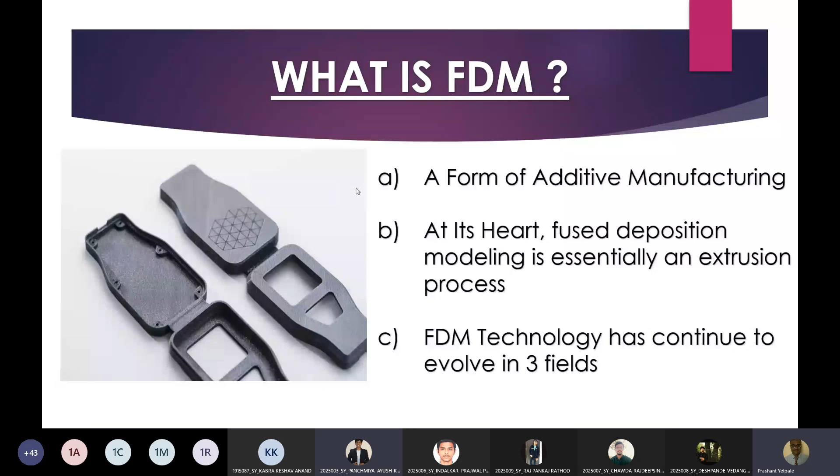So let's learn how FDM works. It's a good question. Here is how the FDM fabrication process works: a spool of thermoplastic filament is first loaded into the printer. Once the nozzle has reached the desired temperature, the filament is fed to the extrusion head, as you have seen in the diagram, and into the nozzle where it melts.

The second process is that the extrusion head is attached to a 3-axis system, allowing it to move in the X, Y, Z directions. The melted material is extruded in strands and deposited layer by layer in predetermined locations where it cools and solidifies. Sometimes the cooling of the material is accelerated through the use of cooling fans attached on the extrusion head.

The third part is that to fill an area, multiple passes are required, similar to coloring a rectangle with a marker. When a layer is finished, the build platform moves down, or in other machine setups, the extrusion head moves up, and the new layer is deposited.

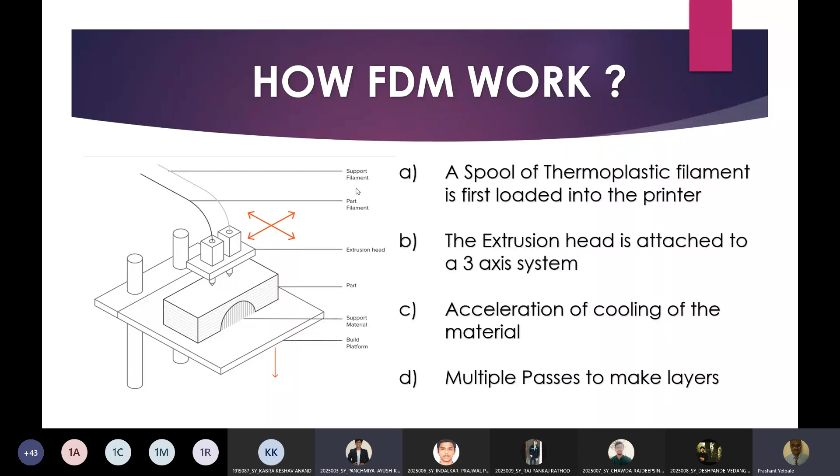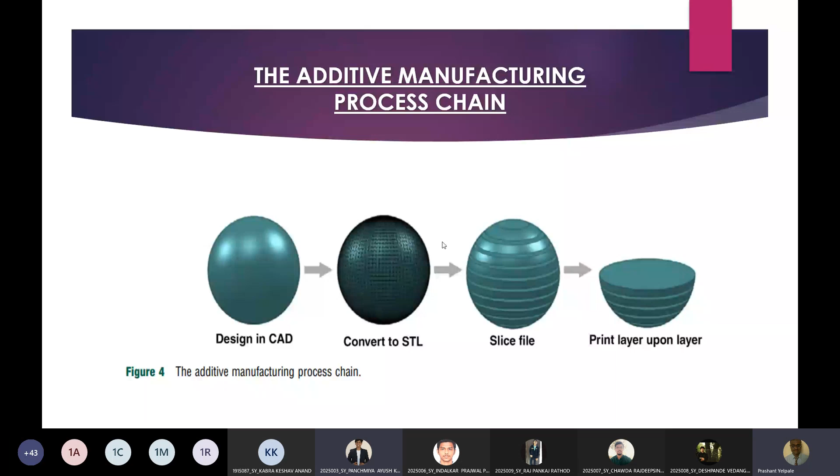This is the additive manufacturing process chain. First, as I have just told you, we design in CAD, then it is converted to STL, which converts it into layers, and then this slice file is printed layer upon layer. So this is a short and brief explanation of how FDM works.

Let's move on to warping. Warping is one of the most important defects in FDM. When the extruded material cools during solidification, its dimension decreases. It is one of the most common defects in FDM.

As different sections of the print cool at different rates, their dimensions also change at different speeds. This differential cooling causes the build-up of internal stresses that pull the underlying layer upwards, causing it to warp, as seen in the figure. From a technology standpoint, warping can be prevented by closer monitoring of the temperature of the FDM system, for example the build platform and the chamber, and by increasing the adhesion between the part and the build platform. So this is something about warping.

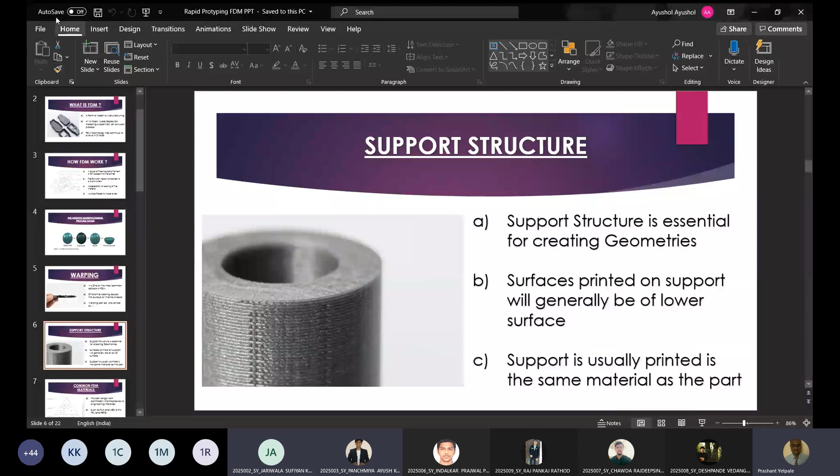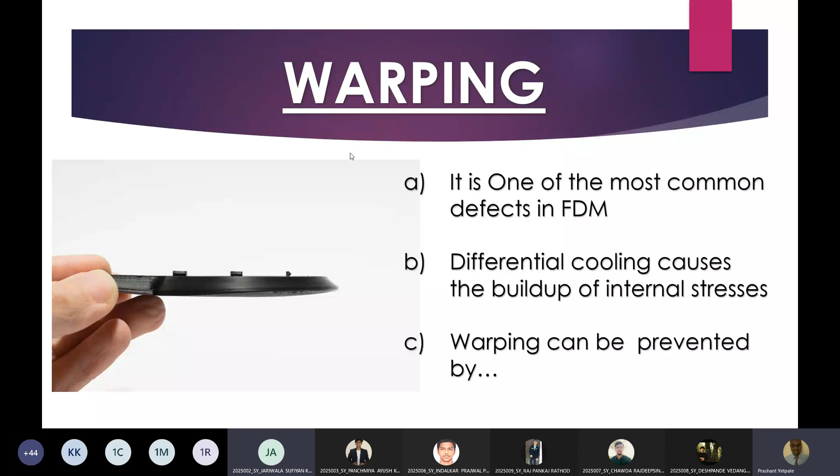Okay, so now warping is in front of me. Yes, from support structure. So my name is Sufiyan Jariwala, I will be doing this support structure part.

The support structure is very essential for creating geometries with overhang. That means if we have a shape with a 45-degree angle, we need an overhang support. Without that, we will not be able to make it, because we cannot directly make it in the air, so we need support or overhang.

It is recommended that the part is designed in such a way as to minimize the need of support, because the surface of the overhang is of lower quality than the other sides. Therefore, it is generally advisable to avoid using supports. There is also a dissolvable support which dissolves after its use, but it is very costly. Next slide.

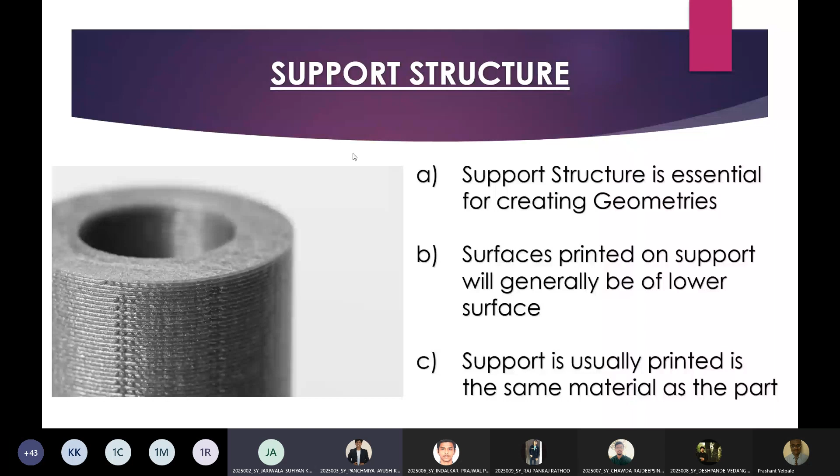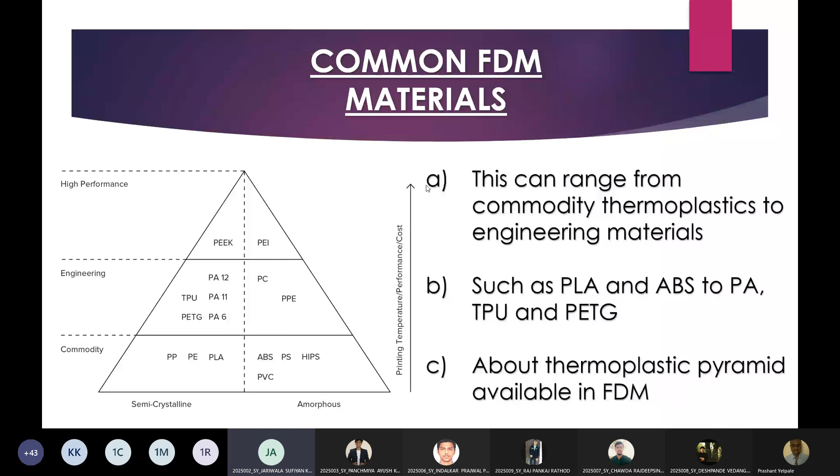There are different characteristics of FDM such as infill and layer adhesion, which are not included here. The common materials used are polymers such as PLA, ABS, PETG, nylon, TPU, etc. The choice of material generally depends on what the user wants to print. The figure shows key criteria needed to choose the material, such as commodity for engineering purposes, high performance, etc.

The post processing processes involved are support removal, sanding, gap filling, polishing the surface, priming and painting, smoothing with vapors, epoxy coating, metal plating, etc. These are the various post processing processes.

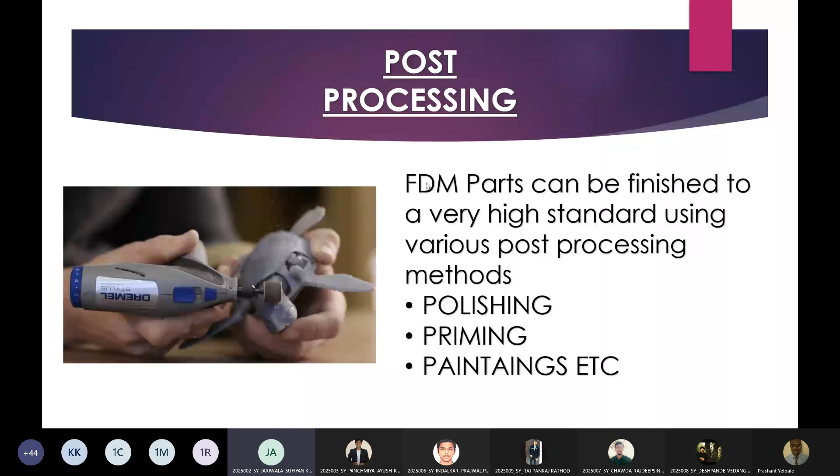FDM process offers several advantages: simplicity, safety, and ease of use. FDM machines are safe, reliable, easy to use, and office friendly. As there is no toxic material, powder handling, intense heat, or laser involved, parts can be handled immediately after fabrication.

The second advantage is no material wastage. Being an extrusion based process, only the required amount of filament material is used to create the part and the supports. Therefore, there is no material wastage.

Variety of build styles. FDM process allows extensive possibilities of tool path build styles used in each layer by altering appropriate process variables such as raster width, fill pattern, raster angle, and air gaps. Raster width or road width refers to the width of the deposition path related to size.

Ease of material change. FDM machines use feedstock filaments in spools and cartridges. Therefore, it requires minimal effort to change material on the FDM machine.

FDM uses a variety of engineering polymers. The simplicity of the FDM process offers potential for introducing new materials consisting of both polymers and composites.

Ease of support removal. Normally, supports can easily be snapped off by hand from models. Its maintenance cost is very low, and machines can run unattended for hours.

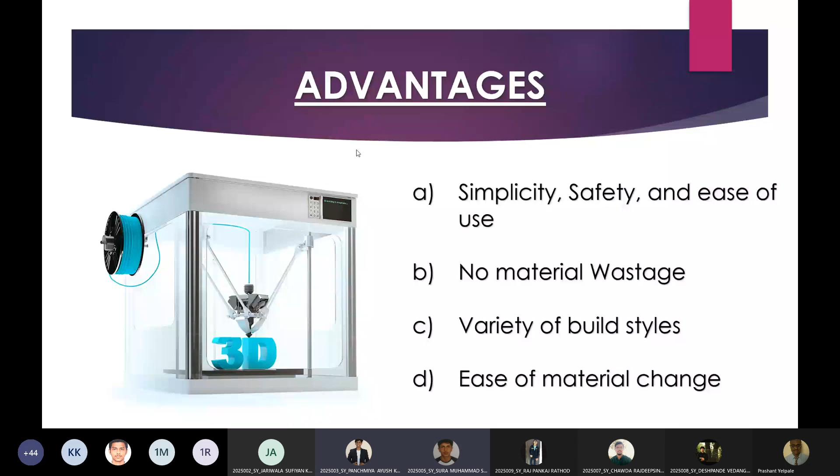FDM has limitations too. The very first limitation is surface finish and accuracy.

As the filament material is extruded through a circular hole of the model tip, the deposited beads have a round cross-section, which limits the accuracy of the parts. Moreover, because of the layer by layer deposition process, the staircase effect on sloping or curved surfaces generally causes a grainy surface finish. The second limitation is build speed.

Generally, build speed is slow because a single model tip is typically used to deposit material. The third disadvantage is feedstock filaments. FDM material needs to be made in filament form of required diameter, required mechanical and rheological properties. Any new material to be introduced must also meet these requirements.

Anisotropic properties: first, let's see the meaning of anisotropic properties. An anisotropic property is a property of an object or substance having a physical property with a different value when measured in different directions. As the parts are built by depositing extruded rods, the mechanical properties of the parts are not the same in all directions. Orientation of the part on the build table also affects the mechanical strength of the part in different build directions.

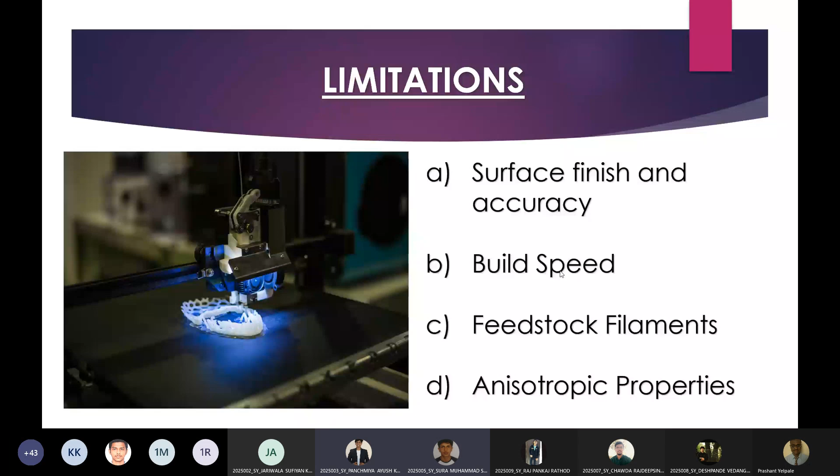Applications: the common application of using FDM for prototyping is well known. Here we will focus on advanced applications deployed in industries that use the FDM process. 50% of the usage of FDM is still for the fabrication of rapid prototypes. As technology continues to improve this area of use, most of the products described below can be considered well beyond the realm of rapid prototypes.

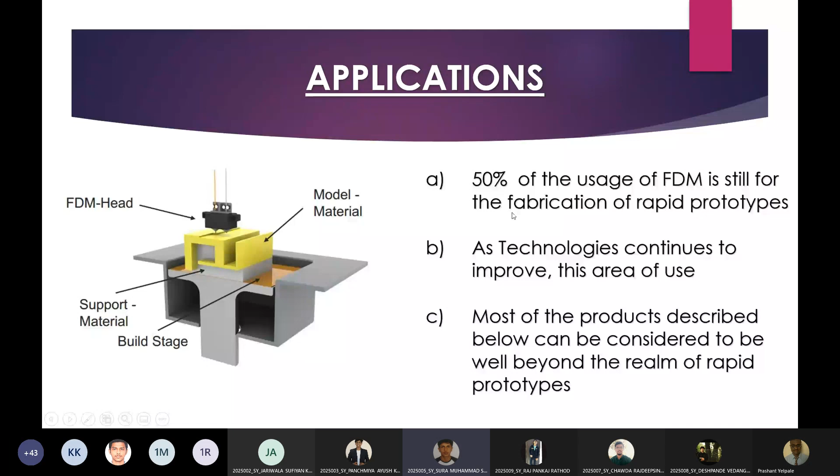The first application is to make jigs and fixtures. Often tools like jigs, fixtures, and guides are virtually invisible when production is running smoothly, but their importance becomes evident whenever problems arise. The adoption of 3D printing via FDM in this sector is driven by the ability of clients to design and test functional parts for form and fit without needing high-cost tooling. With resilient materials, parts are built strong enough for end-use applications. The picture shows inspection of a yoke using an FDM fixture.

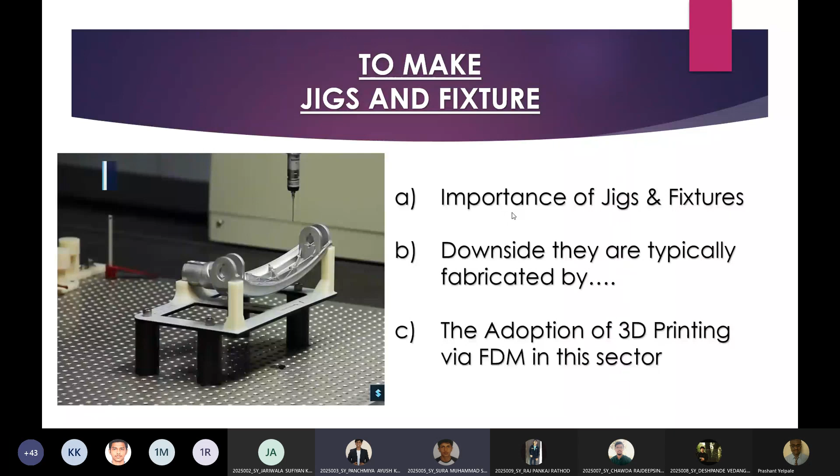The second application is for validating the design of an automobile. FDM truly shines in the designer's ability not to just give the thumbs up to the design, but also validate the design through functional testing. Through FDM, designers have greater confidence that their design will be acceptable once they pass it on to the manufacturing team.

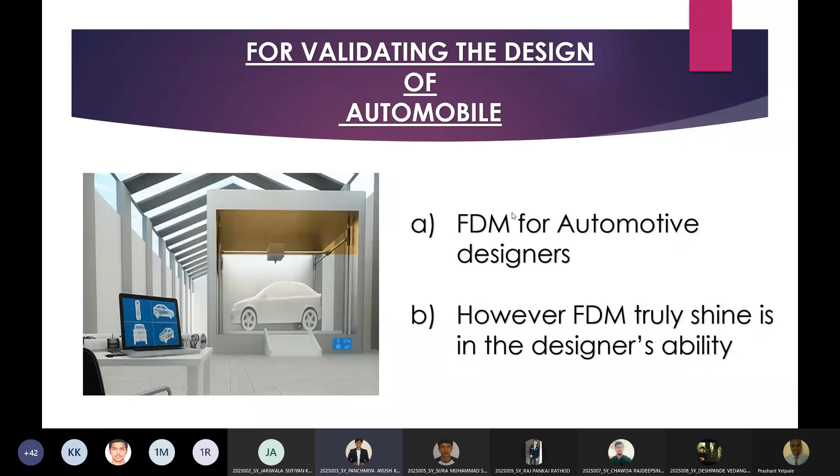So I'm Luai Darwaza. I'll take on the presentation from here to go on and touch about the different applications of the FDM process that are currently used in the industry. Our friend Sura gave a basic explanation of the application that he explained.

So as we start, we'll see the aeronautical applications in which the FDM process is used. Aeronautics is a field in which a high amount of research is going on, and there is a huge economical incentive to decrease the cost and increase the production rate of rockets. As you can see in the picture, that's the world's largest 3D printer currently deployed, and the part being manufactured is a fuselage or a fuel tank of a rocket. Could we go to the next slide, please?

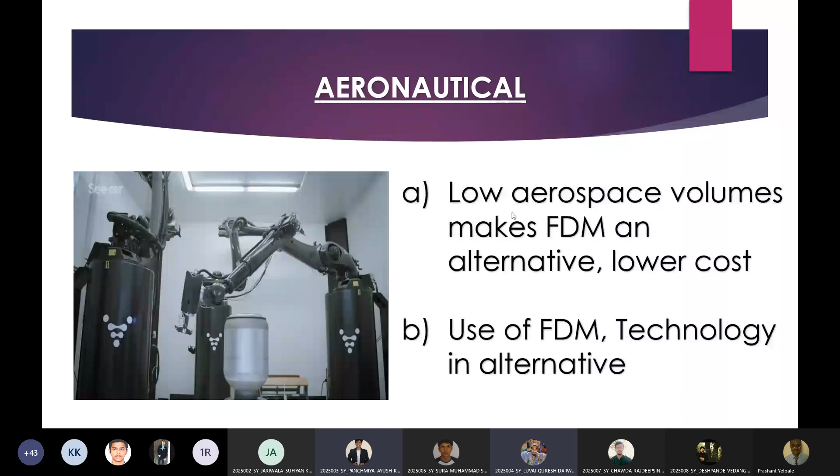So the rocket in the picture that you can see is the Atlas V rocket built by United Launch Alliance. It is a NASA-funded rocket, and it currently uses 3D printed parts. It is estimated that using the FDM process and 3D printing, we are currently saving $1 million annually just by changing the manufacturing technique. Let's go to the next slide, please.

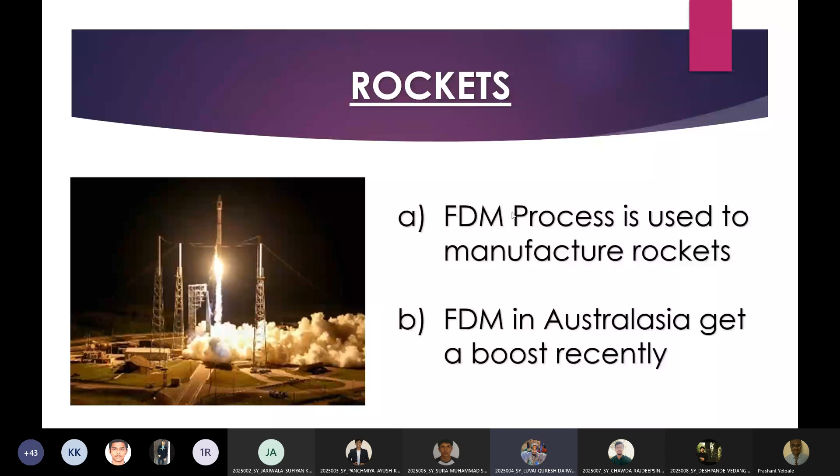This is further used in the dental industry to produce dental crowns, as well as with the recent innovations in FDM materials, titanium can also be printed using the FDM process, making sure we can print cranial plates, knee replacement plates, or jaw replacement plates using the FDM technique. Will we go on to the next slide, please?

So, bioprinting of tissues and organs. Now, it is quite common to hear that there is an organ shortage in the medical industry, and people need to wait years and years on the donation list. Using the FDM process in current research, we are able to print a number of basic organs, and further research is going on to print a complete organ such as the heart.

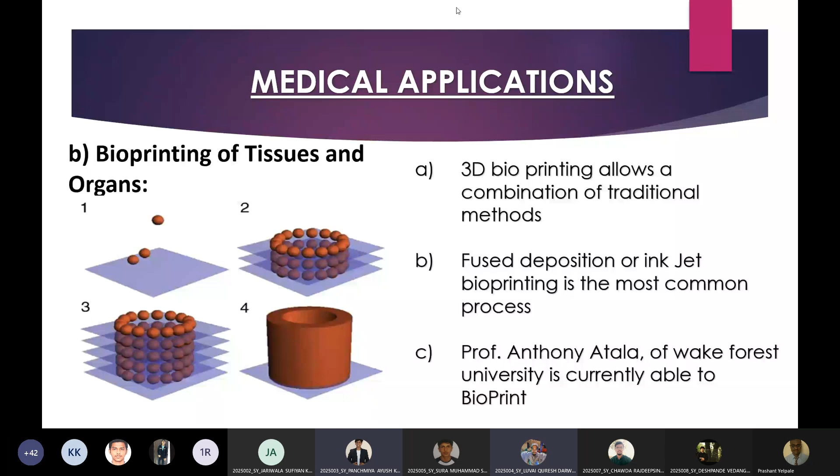We use bioprinting, or inkjet bioprinting, in which droplets of living cells are placed on a substrate. Substrate is a substance that would hold that particular living cell and replicate an organ. Current research is going on at the International Space Station in order to print these structures in zero gravity, so that no support structure is required and the organ does not collapse. Let's go to the next slide, please.

Similarly, in the medical field, drug dosage is a huge field. Each user has to be given a certain amount of drug in a certain proportion. With FDM, a particular file of the amount of material, structure, and composition can be given to the user, and the user can print that particular medicine and take it when required. This is in the research phase currently, and it is being deployed as we go. So the next slide, please.

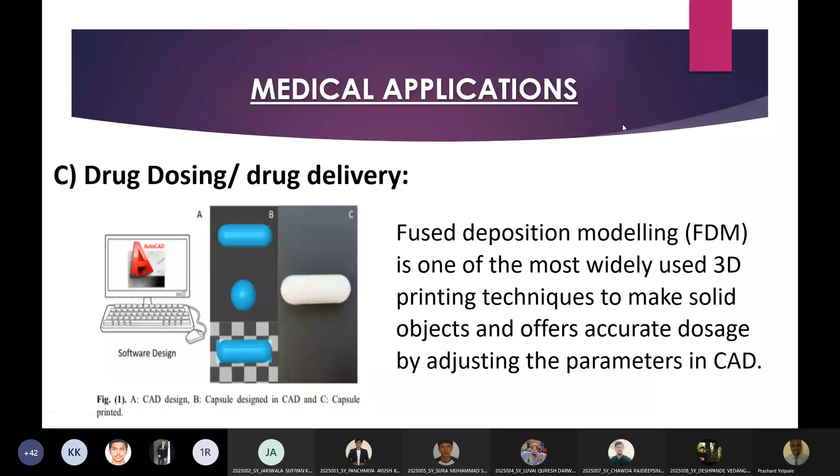So, printing of houses and construction. Now, Larsen and Toubro, L&T, has currently built their third house using the FDM process in India. It all started with the University of Southern California's development of contour crafting technology, which is not dissimilar to the FDM process. It extrudes a stream of concrete and uses this extrusion process to print the walls of the house.

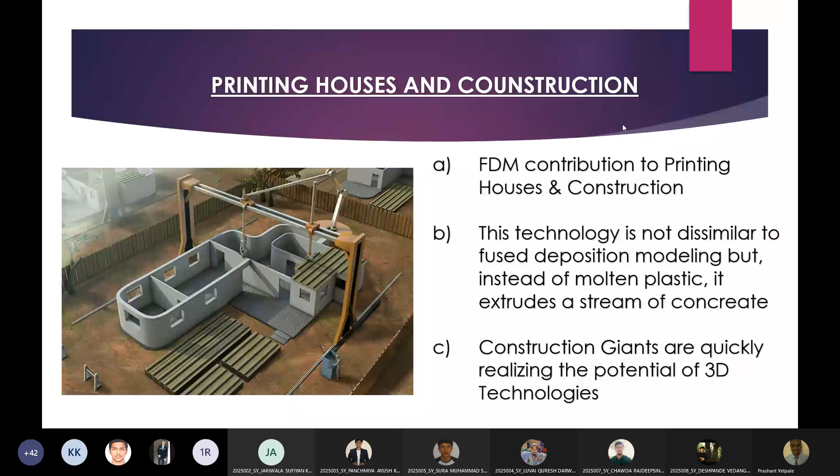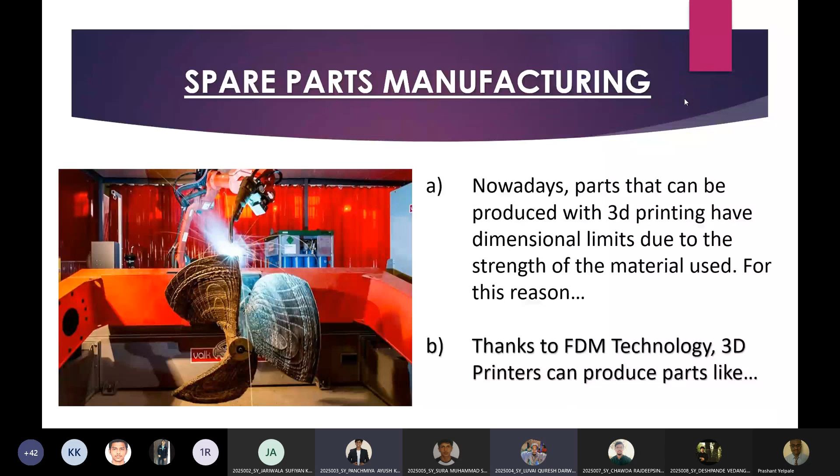So let's go to the next slide, please.

So we would conclude by saying that FDM has established a prominent position in additive manufacturing since its inception two decades ago. This technology has attained market leadership in terms of the largest number of units installed in plastics-based additive manufacturing. The simplicity and reliability of the technology has also prompted the development of several other non-filament type extrusion-based FDM processes. FDM has been extensively used by the research and development community at universities and research organizations to further enhance the process and part quality, and to develop new materials for a variety of new engineering applications.

It is expected that future research in the FDM process will be directed to increase build speed, improve surface texture, and develop new materials and plastic compositions, as well as biomaterials for specific commercial applications. Research in new FDM will be dictated by the intended application and its suitability for FDM process conditions.

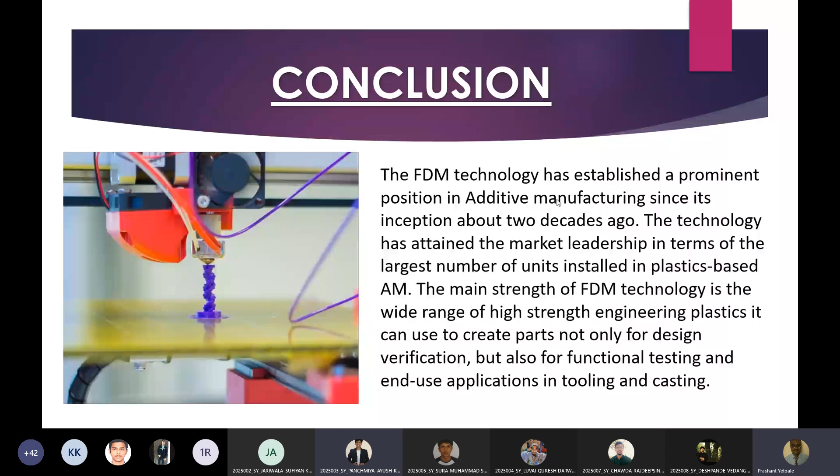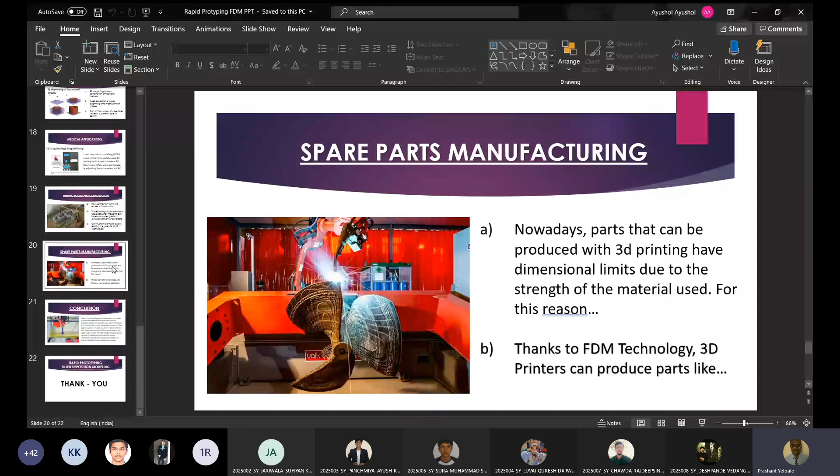So wide areas of applications are covered by the boys here, because in theory we have studied this process in detail, and even in our term work we focused on FDM. But how the application extends - even what he said about aerospace, building a model of a home, what L&T are doing, then NASA making some components and reducing their cost - these things are new to us, and that was quite an interesting seminar.

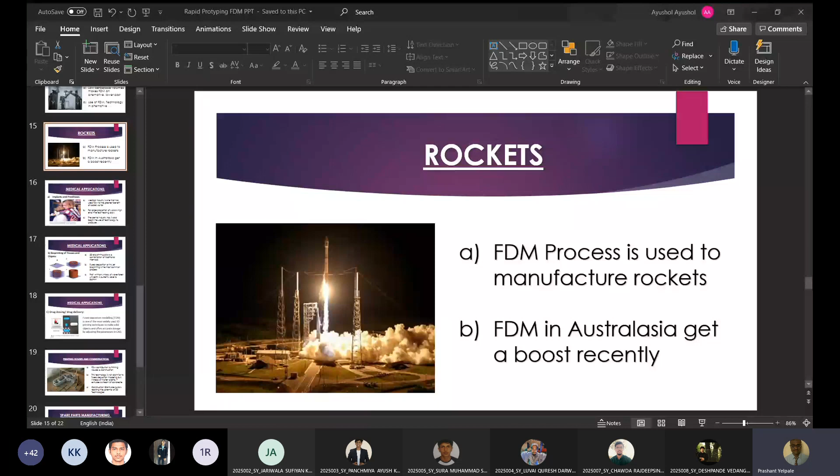Recently in the news, NASA was holding a competition called the 3D Printing Habitat Challenge in space. The research and architecture studio AI Space Factory has designed a 3D printed house called Project Marsha, to have a house on Mars. They are designing that house using FDM printing only.

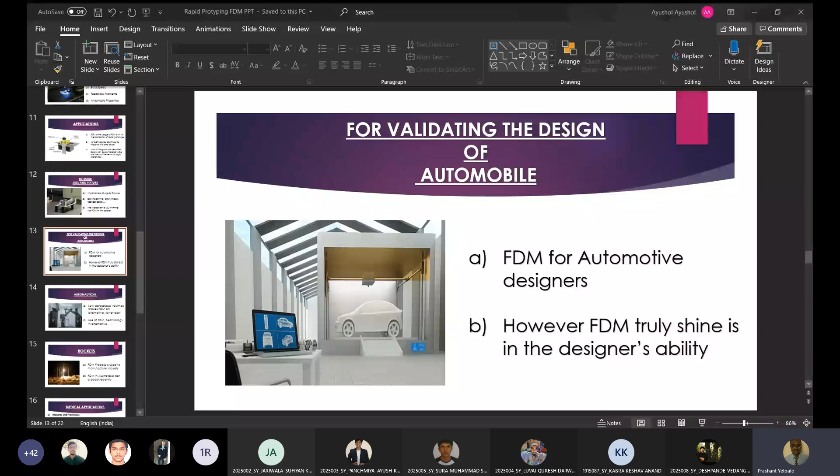So FDM is gaining compared to other rapid prototyping processes, getting more weightage - that is observed. I also heard NASA had organized a competition to print a house on the moon. They gave a material similar to regolith, the moon sand, and a number of people printed a house with that material. But the material we use day-to-day for FDM is plastic. When it comes to high melting point material, how are they coping - how are they doing the extrusion and heating? That is quite interesting to know. Many things have to be seen actually - this is an area of new research now. It's quite a good seminar.